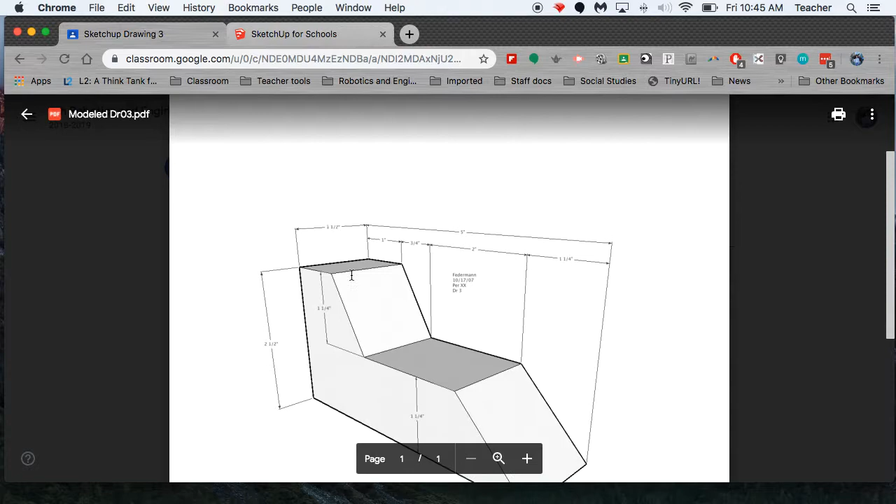Okay, we're going to take a look at drawing number 3. That's this one. This is the handout you guys have. Again, if you need to make it bigger or smaller so you can see because those numbers are small, you can zoom in on these. Okay, I'm going to go ahead and zoom out a little bit.

Okay, this is the drawing, and we're going to model this front side right here. This is going to be a little bit tricky because we've got to go down and over, and we've got to find this point. And then this line, we got to locate it precisely so that it's in the right place. And we're going to use a new tool called the tape measure tool to put a guideline in to help us with that. So without further ado, this is drawing number 3.

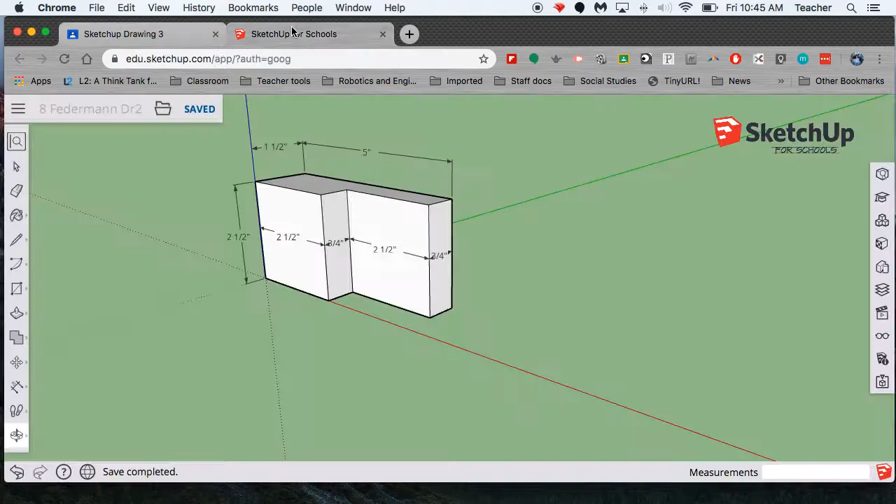I'm just going to create a new one. New model, simple feet and inches. Let this guy go. So this drawing is 5 inches long, and I get that measurement right here. So from here to this point down here is 5 inches, and it's 2.5 inches tall. And this line right here is 1 inch, and I get that right there.

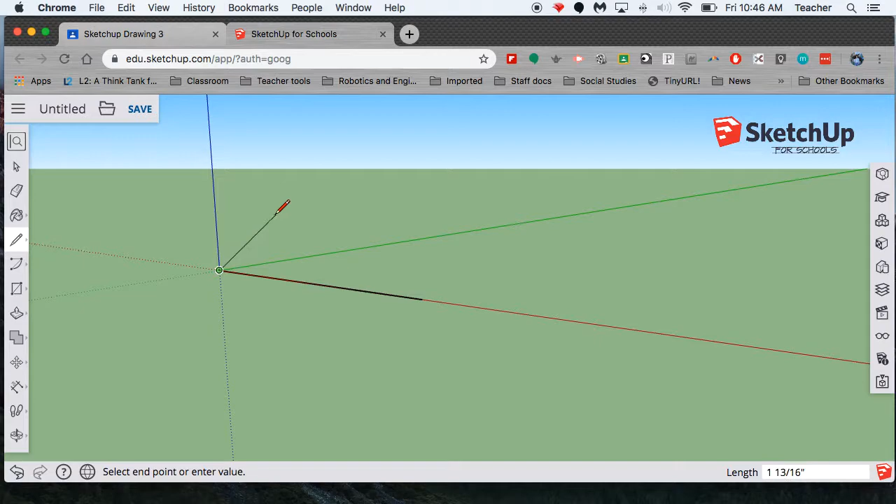So I'm going to click on this red line, come this way, and that's 76 feet currently. So I'm going to type 5 quotation for inches, and it's going to get real small and disappear. Not to worry. I'm just going to zoom in. I can start to see my line. There it is. So now I'm going to go up the 2.5 inches, so 2.5 quotation return.

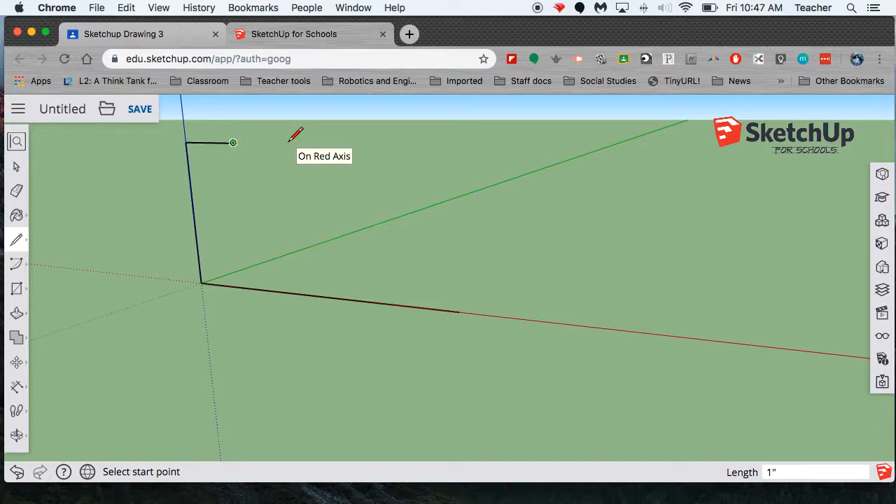And then along the red axis this way, not the green one. Remember, if you do the green one, when you orbit, you're going to notice it goes the wrong way. I know it's kind of an optical illusion. So do the red axis, 1 inch return, and then escape. So now let's take a look at this.

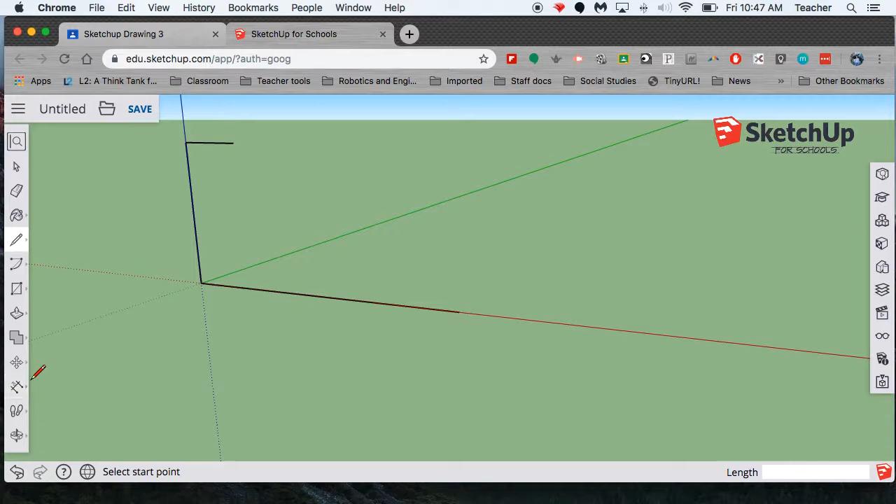So this point, to get here, we need to go both down 1.25 inches. And then we also got to go from here over this amount, which is 3/4 of an inch. So what I'm going to do is use the tape measure tool. And it's right here, the tape measure.

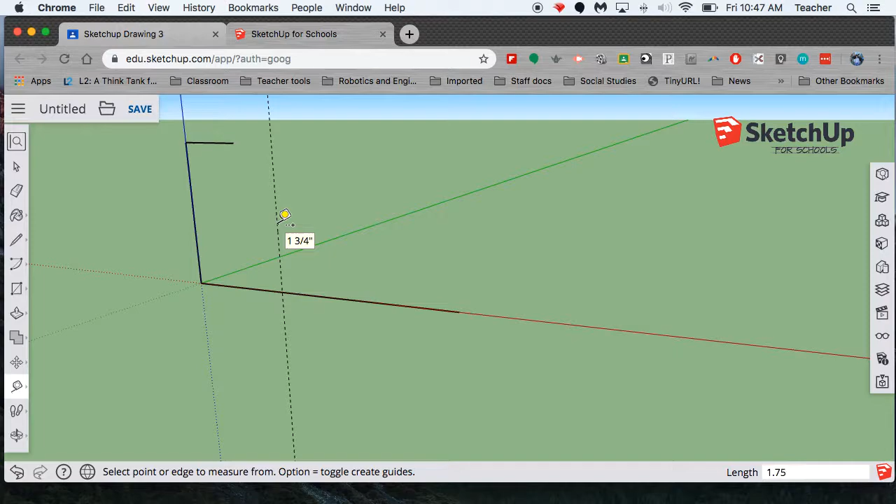And if you click on a line, it'll put a parallel line in it as long as you don't click on the corner. If you click on a corner, it wants to put just like a little point, and we don't want that. So click on the line, you're going to go over 1 inch plus a little bit more, 3/4. And if you want to, you can type that in, 1.75 quotation. You can see in the lower right-hand corner down there that the measurement went in. Okay, just don't drag over there when you're typing the dimension because it will mess it up.

So you just click, you drag, you type in 1.75, and then return, and the line should go to where it needs to be. I have 2 of them there, so I'm going to take one out and do it one more time. T, by the way, oh, there we go, 1 3/4.

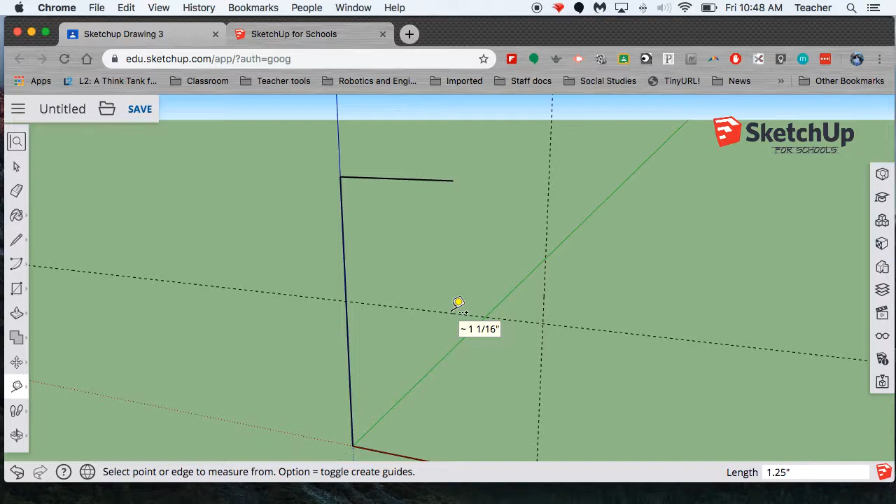Okay, so I know from here to here is 3/4 of an inch, but I got to go from here down 1.25 inches. So tape measure. Again, don't click on the end, just click here. Go straight down, blue line, 1.25 quotation return. Now I can draw my line from this point to this point. And that's the hardest part about this assignment.

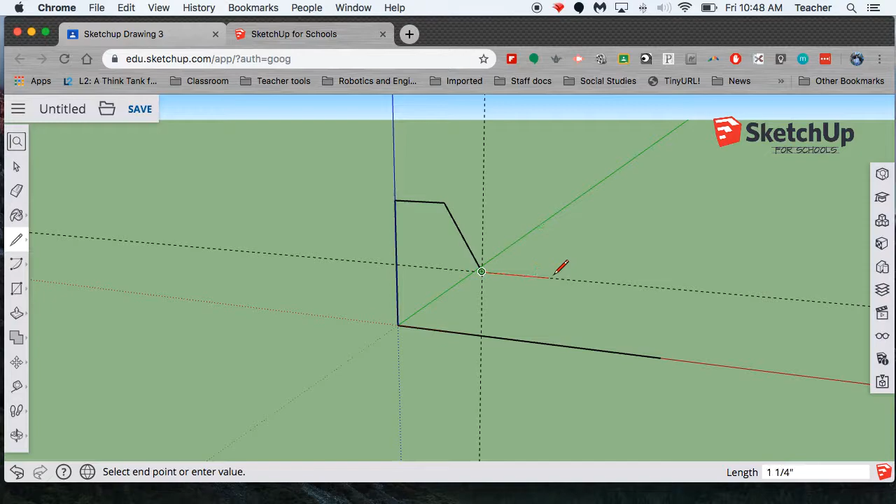So now I just got to draw this line. It is 2 inches. And then I'm just going to connect the end of that line to the point. And I'm going to go over, type 2 quotation return, and connect to the end point. And now the face fills in. I can use my push-pull tool, which is over here, or I can just press the P key and go in 1.5, just 1.5 quotation return.

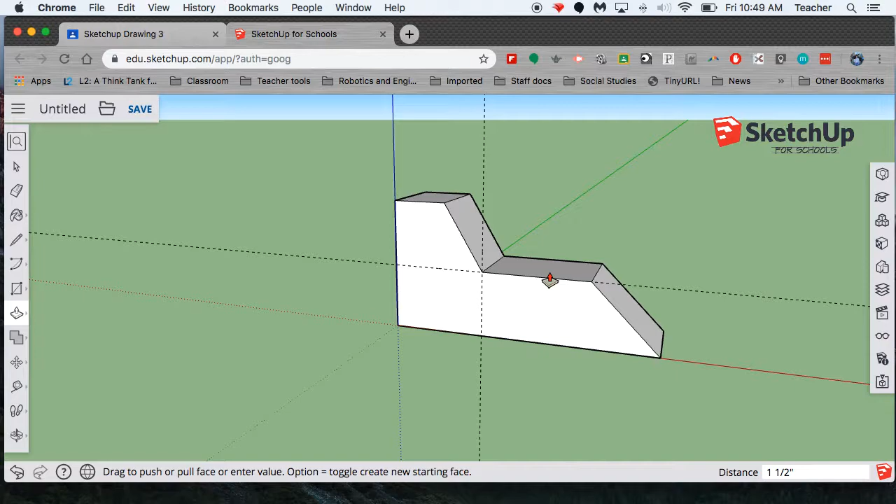And now I can erase. So now I'm going to put my measurements in. Dimension tool. I'll click here, then down to here, then up. This one you can click to come up, and this one turn it blue and just drag to the left.

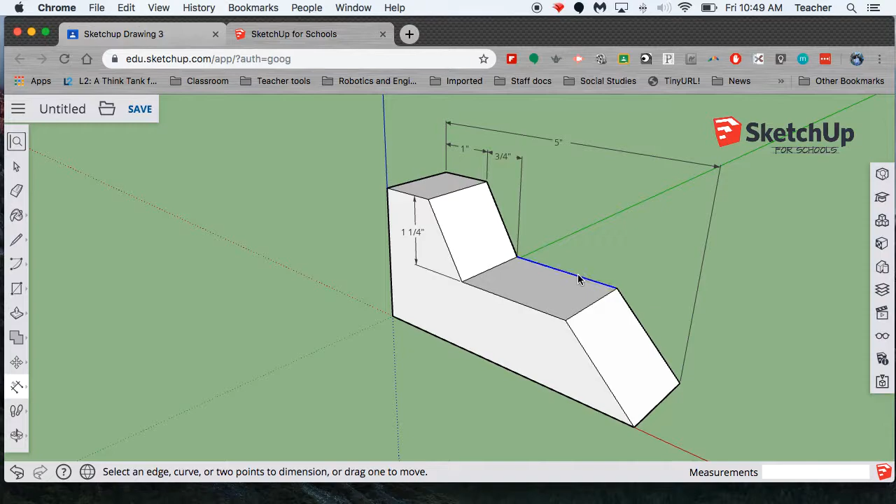And you can see how I'm clicking on those. If it doesn't want to turn blue, you can always just click on the corners. Clicking right here and coming across, clicking right here and coming across that way. All right, so again, it's a good idea to count your measurements.

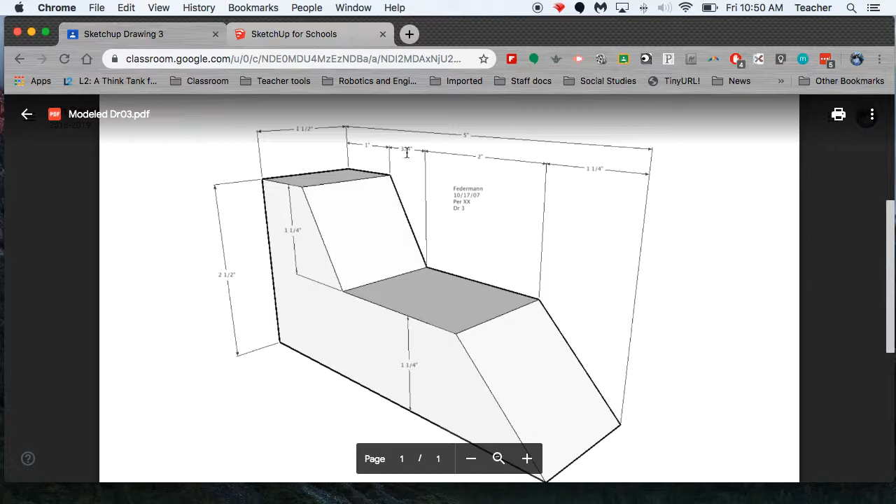1, 2, 3, 4, 5, 6, 7, 8, 9. Oh, there's one more. I forgot this one, 10. 1, 2, 3, 4, 5, 6, 7, 8, 9, and 10. So let me come back and add that one in.

Okay. And then again, always save your work. Please save it and name it your period number, your name, and DR3, okay, for this drawing. Thank you.